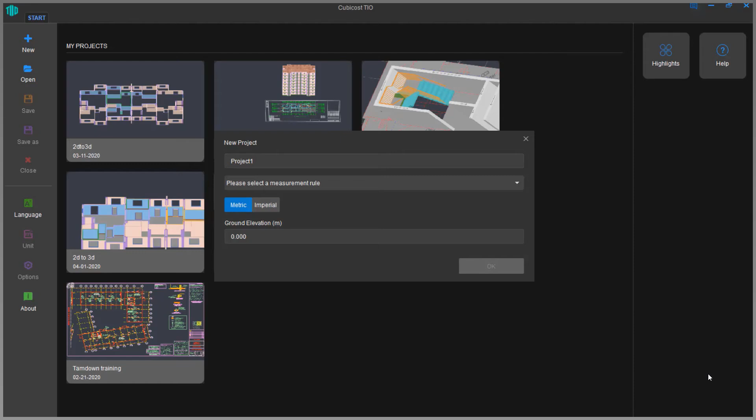So the themes were reduce, how you can reduce your time wasted and add value where it matters most. Avoid duplication of effort, that's with the use of our intelligent measurement rules. And finally, improve your accuracy of calculation.

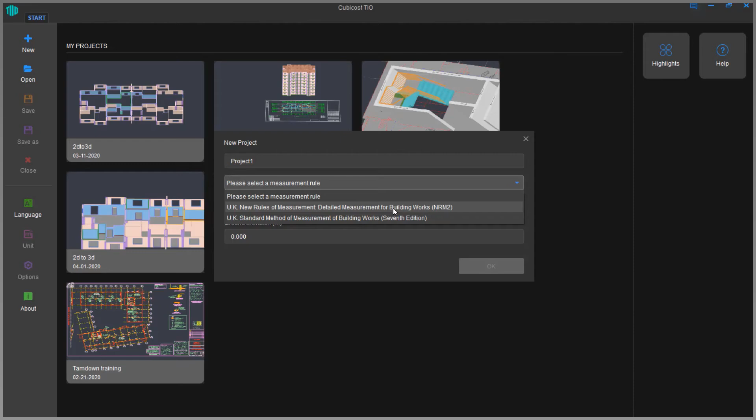Here I'm creating a new project so I can demonstrate this to you. As you can see, when we create a new project, we get the option straight away to choose between NRM2 or SMM7. Of course, if you are viewing this webinar from elsewhere, we have local packs depending on the country you're living in as well, for quite a few of them, so please do get in touch.

Once the project has been initialized and it's loaded up, you'll be presented with this view.

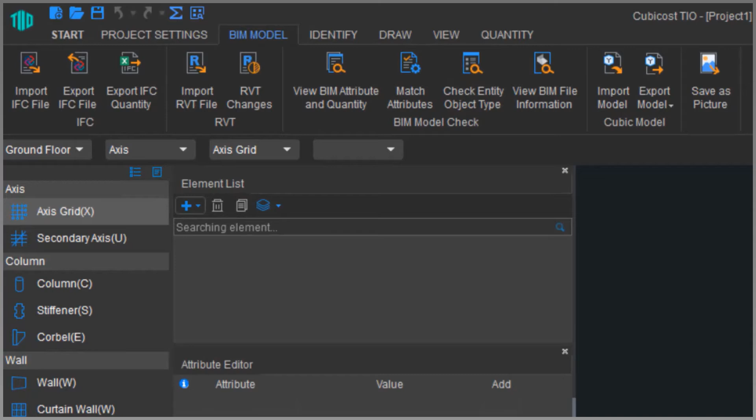What you'll notice is up top we can work in BIM, so you can import IFC, you can also export IFC, and import Revit models, and if the Revit model has a change you can work with them as well. Another way you can work is by identifying.

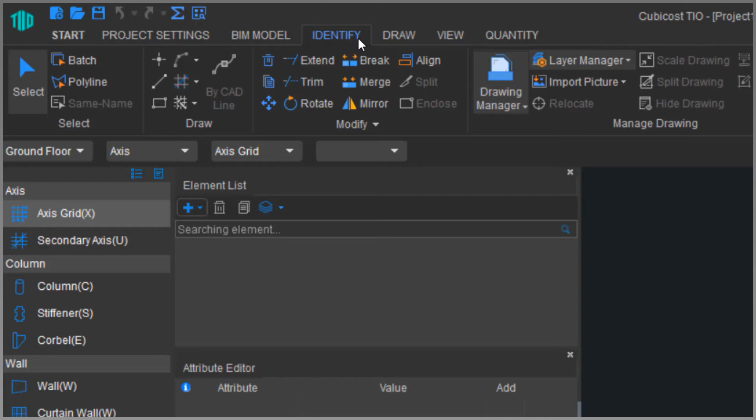Identifying is the process I'll be covering today. That's for our 2D to 3D takeoff. It's when we try and speed up the process by using either layers or colors to do the takeoff. And finally, manual takeoff as well, so if automated is not what you want to do and manual is better, you can do a manual takeoff.

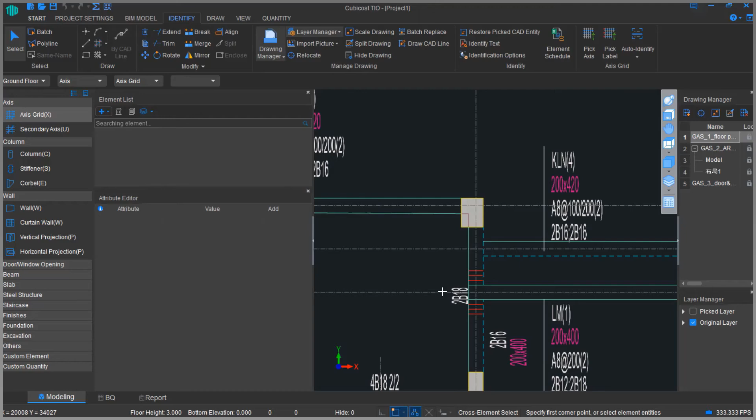I've just brought in this drawing. As you can see, this is a structural model with some very common building elements. So that is a beam. We also have a column here. And the other one is just a slab and some openings.

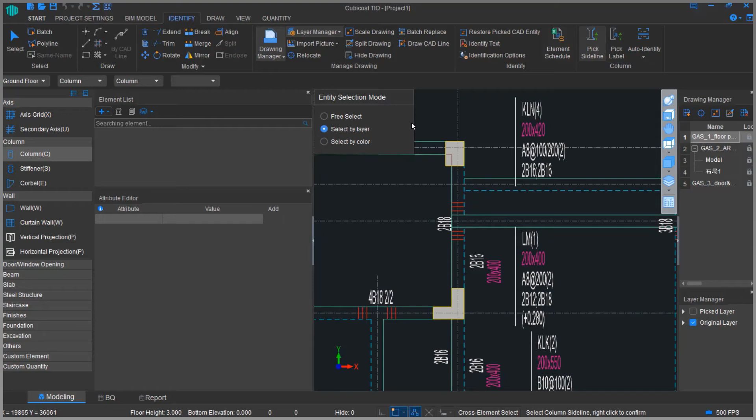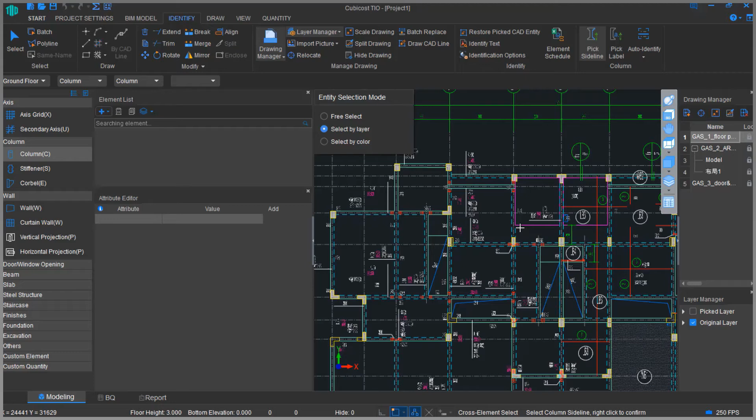Before I move on, one of the things I wanted to cover was digitalization. This is a 2D drawing, a CAD file, but whether it's CAD or PDF doesn't really matter, because we're able to automatically color it. We color it because if layers are not available, we can automate the takeoff based on colors. So when we pick the sideline and tell the software that the outskirts of a certain building entity represents a column, a beam, or any other building element, it's able to identify the rest.

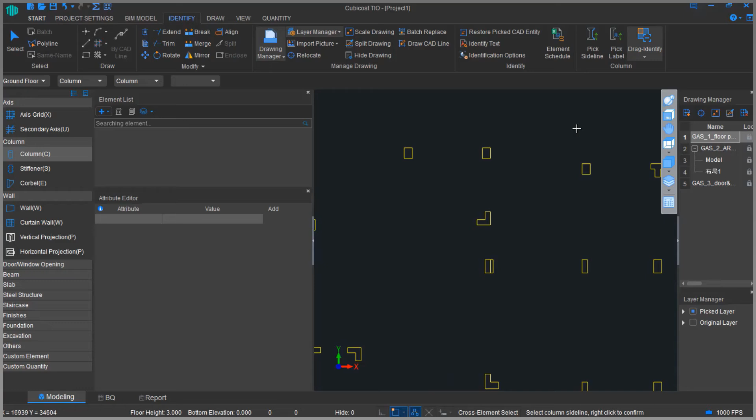Now what we'll do is go to a column in the drawing, zoom in, and tell the software that the outer layer represents a column, then drag identify to say what that building element is. As you can see, irrespective of the shape, it's automatically found all of the columns present on this floor. Now if I drag a box across certain ones, it gives it its properties, and I can do the same for all of it because I know they are all columns.

You'll notice on the left hand side they've been automatically categorized. So you can see the T-shaped, it's got the sectional width, sectional height as well. I can click on any of the categories and see how many of them have been used in this project, this takeoff. So that's 3.

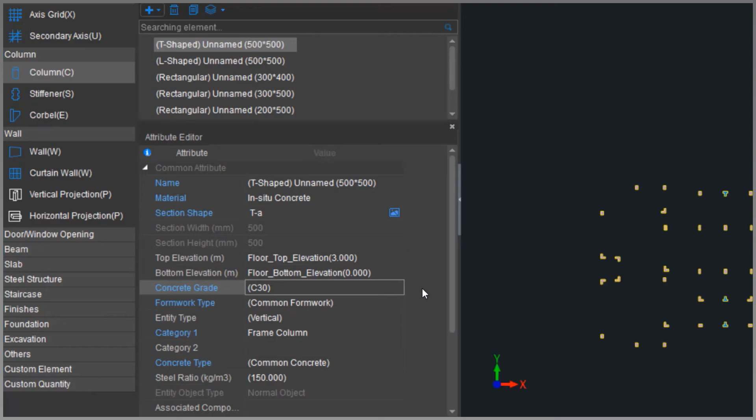I can change the attributes whenever I like, and doing so will not only change how the object looks, not only change the model, but it will also reflect the quantities that it generates, and how it interacts with other building elements. You can also change the concrete grade. By default it's C30, but that's something we can change in the backlog or directly here.

So if I was to just calculate the quantities for the columns, let's see what we've generated. We can view expression to see which calculations would be used. Or we can head over to view quantity, and now we can see it's been split by floor, material, concrete grade, entity type. I've got area of formwork, number of pieces, weight of rebar, the girth.

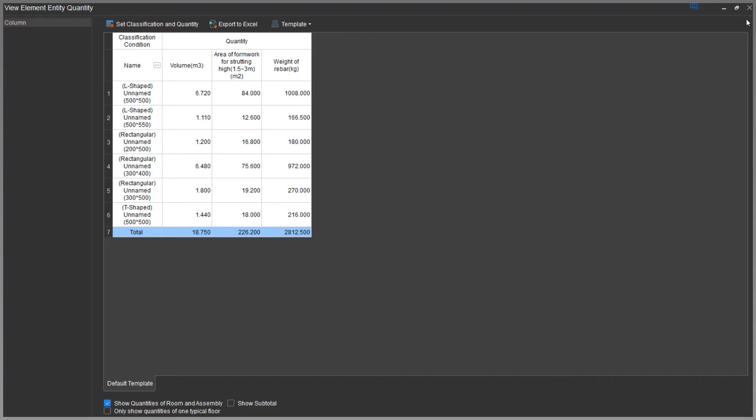And if I head over to set classification and quantity, I can make this as simple as I like just by including the name. And if there's anything I'm not interested in, I can simply uncheck it. I can either save this view or export it to Excel. So that's what we mean by having to avoid duplication of effort - just because we have the intelligent measurement built in, you automatically generate advanced measures.

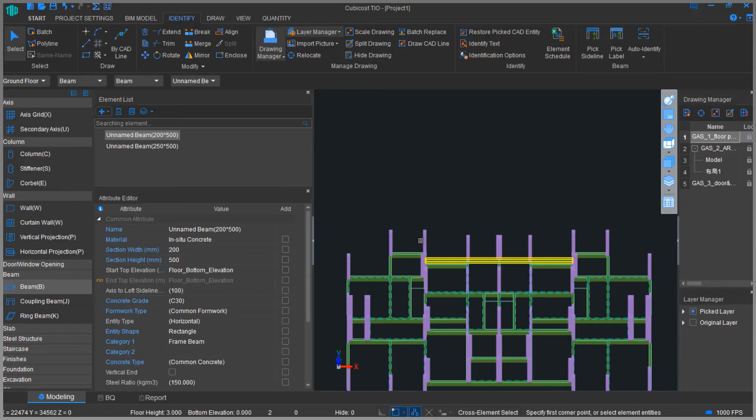Now if I was to repeat the process for the beam, it's exactly the same. Just recognize where the beam is in the drawing, and then you can automatically identify it. One thing I didn't mention was whether it's 2D, DWG, or PDF, it's automatically recognized in our software, by layer or color.

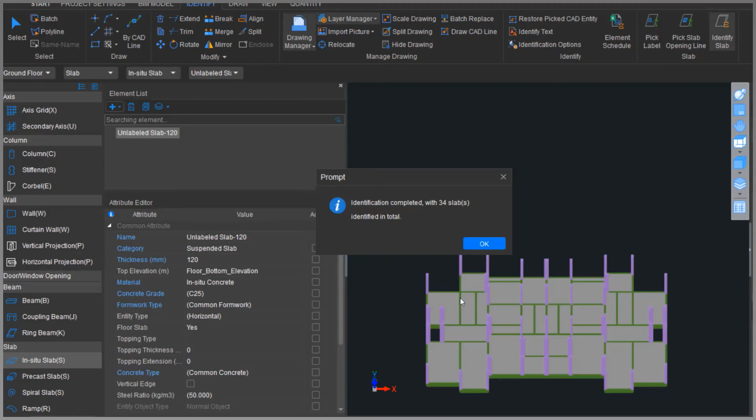Furthermore, let's do the slab now. So when we identify the slab, it bases it off enclosed areas, and it's able to do that. And of course, we can change the settings over here, which will impact the quantities.

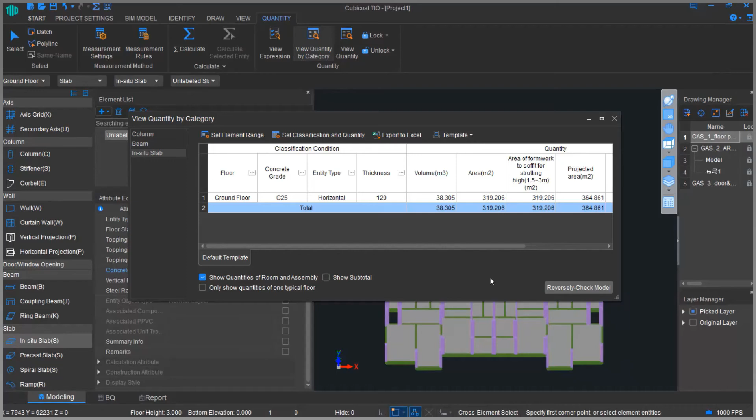So if I was to just recalculate this and then view the quantities, you'll get a very similar view as you got earlier. You have the building elements on the left hand side, and depending on the building element you're in, it will get its respective quantities automatically generated. So there's quite advanced measures, and you can just export this to Excel whenever you like - for instance, here you have it separated by column, beam, and slab.

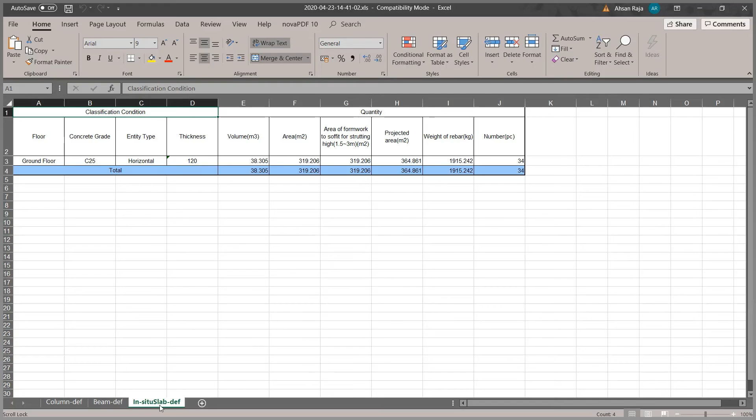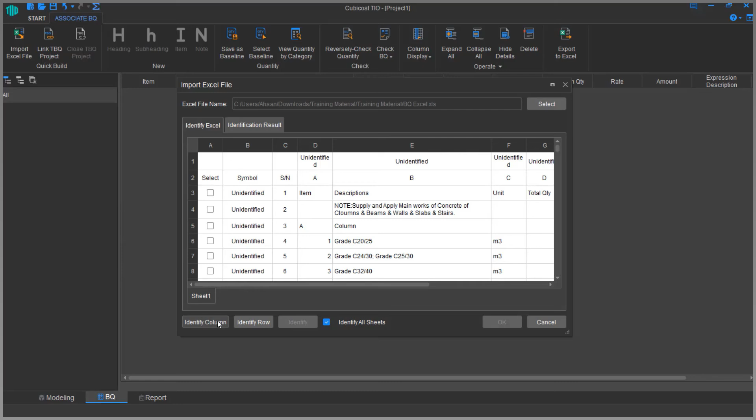Now I've got a question for you. How do you respond to change in a model? Suppose there's a design revision or anything else like that. How do you respond to it?

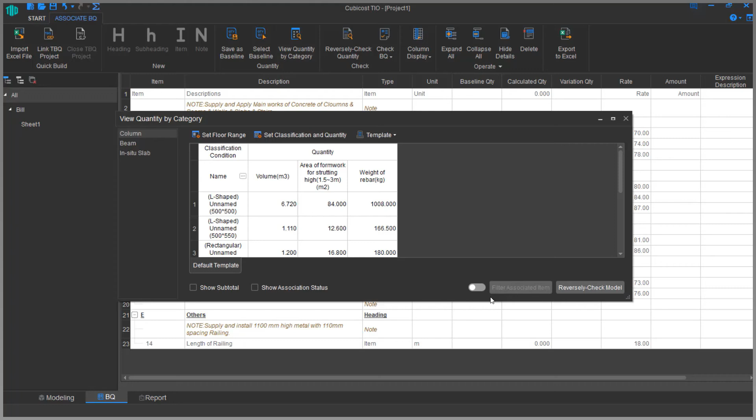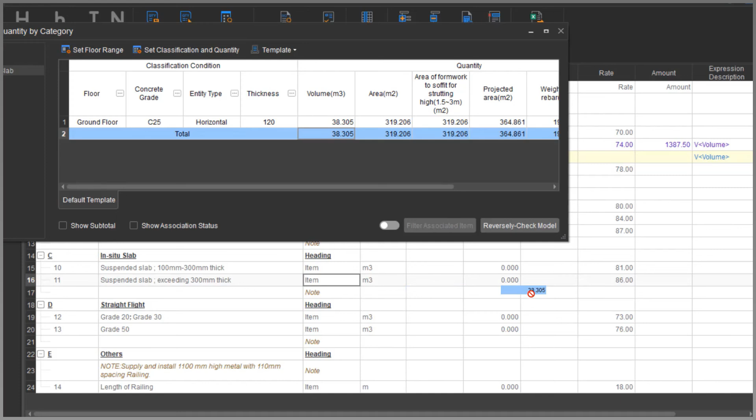Let's give this a test. Here what I'm doing is I'm just linking some of the quantities to BQ, to an Excel file. So let's take the total volume of the columns and just drop it in. This is much better with two screens, but let's just cope with it for now. And let's also drag and drop the total quantity for the slab.

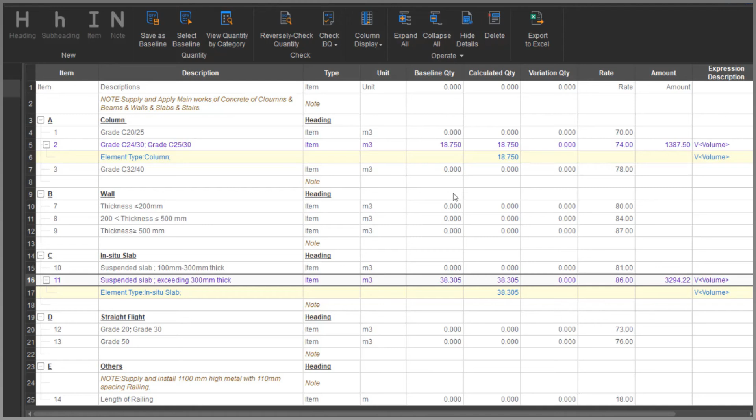What we can now do is we can save a baseline. Saving baseline means if there's any variation, they will all be accounted for. So suppose we just reverse check this first, see where the quantity is coming from. It just takes you to it directly.

Another thing we can do is we can see the association status, to see which quantities have been linked, what has been linked, and that turns to green.

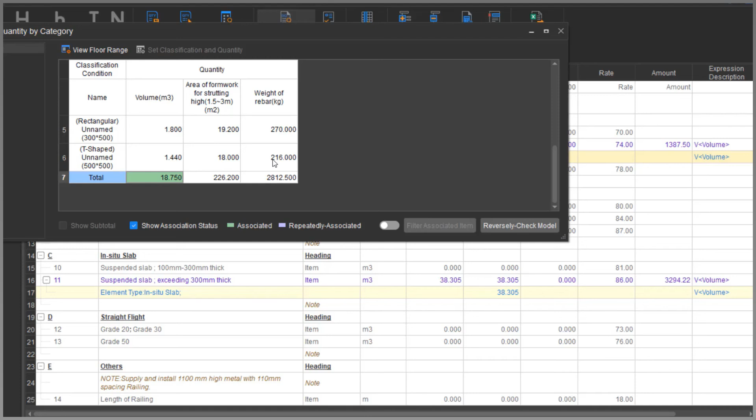If a quantity has been associated repeatedly, then it turns purple. I'll just demonstrate that to you on beams here. So if I associate the beam once, it turns green. And if I was to just drag and drop it, let's say here, it turns purple. It's just so you know when you're double counting.

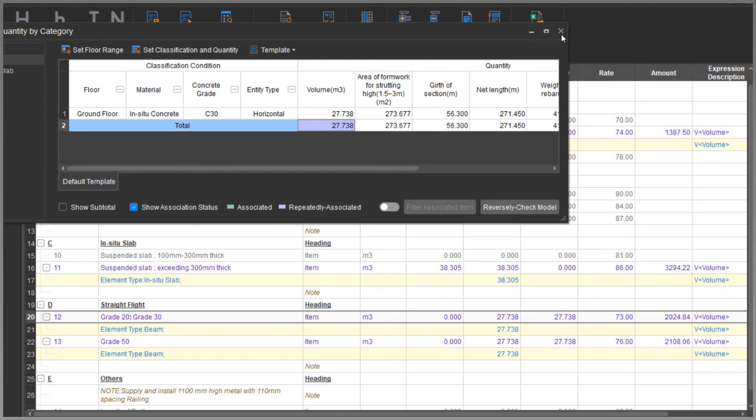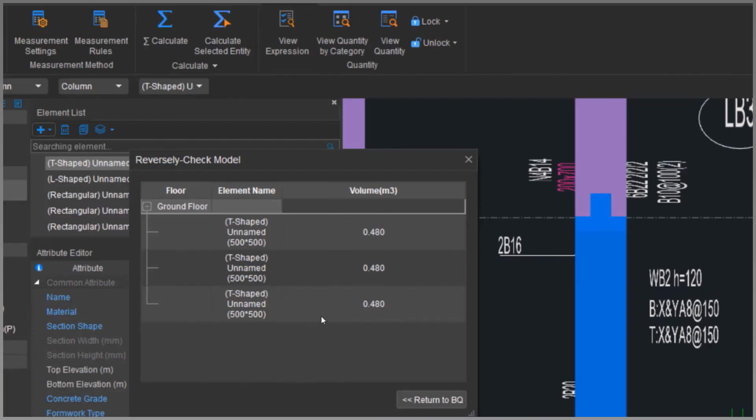So moving on to my example, how do you deal with design change? I've saved a baseline and I know that that quantity has been associated. What I can do is I can reversely check the model. Reversely checking allows me to improve my accuracy of my calculations. I can look at quantities, go back to it, and make sure are there any anomalies, is there anything over here. Just quickly glance through, I just noticed the 0.450.

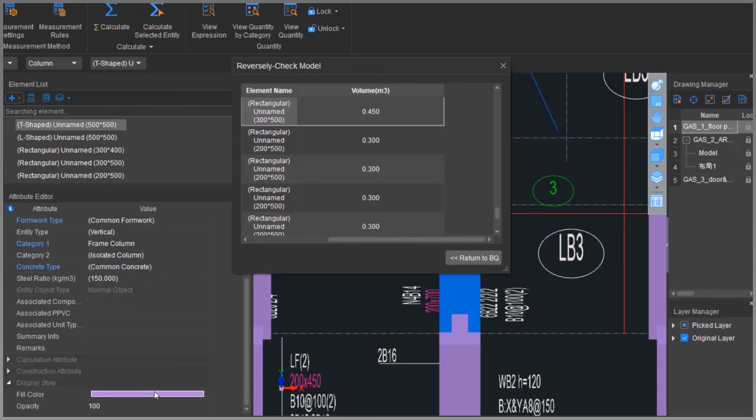If that's something which is standing out and I just want to visualize it further or interrogate it, I can see the attributes for that entity, change its color, and it's been associated differently now. I could also change the name as well, so it's categorized completely separately in my report, but I'll just skip that for now.

Let's say you receive a design change, and the design change, this 300 by 400, so all of those blue ones, have changed, and let's say there's been an increase. Something ridiculous, let's say it's 350. No, let's say it's 750 by 750. And let's also change the color.

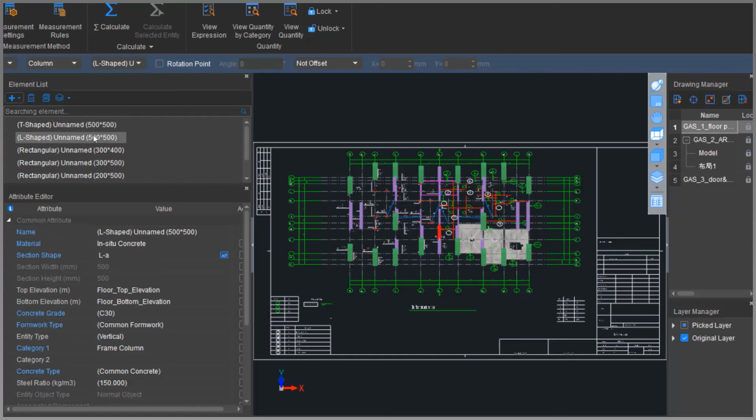This is really beneficial because you can even export this as IFC, so just for visualization it's great. And let's say there's been further changes and the thickness has been reduced from 120 to 100.

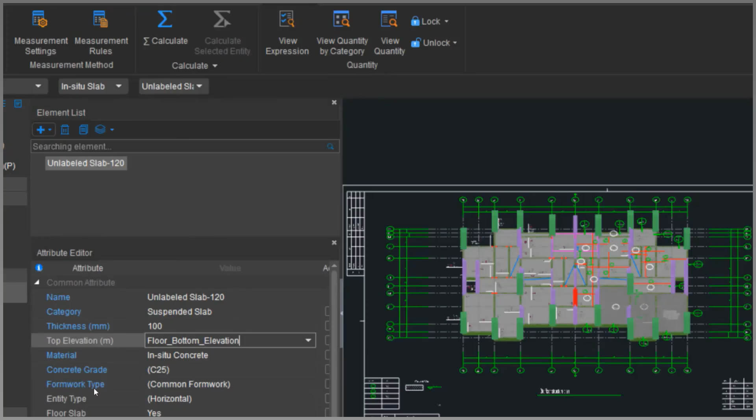Now if we're to recalculate this, run the quantities, just wait for it to complete and head back over to our BQ section, we are now able to see our original baseline was 18.75. New calculated quantity is 42.645, and there's been an increase of 23.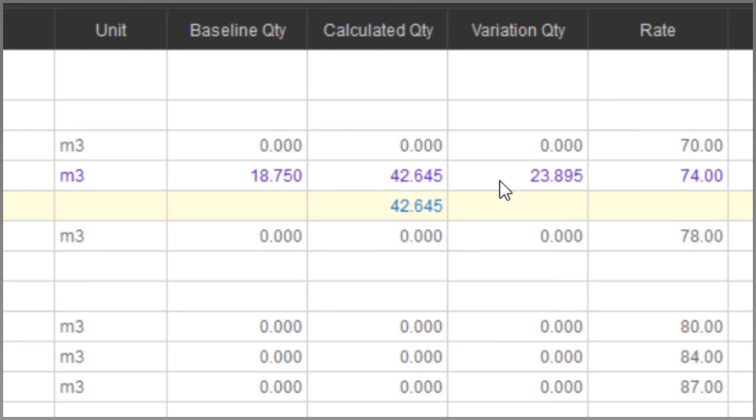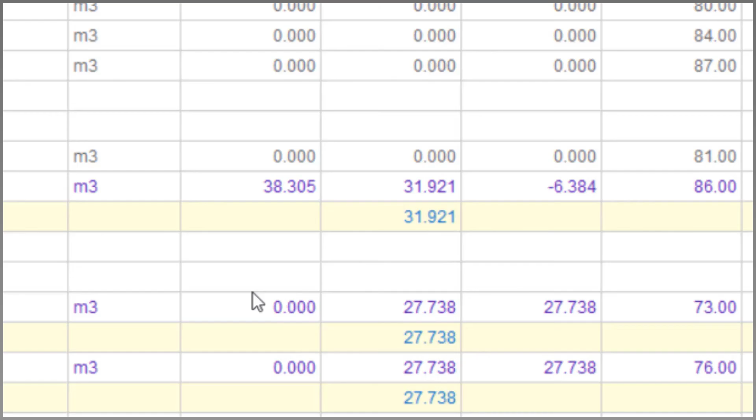If you were to do the same thing and just interrogate the slab, you can see there's been a reduction, as it's a negative number. Just imagine this is just the first floor. Suppose it was a 20-story building, just accounting for those small changes, it can lead up to quite a lot.

It just gives you that confidence in your numbers, just knowing that yes, I'm happy with the quantities that are being generated.

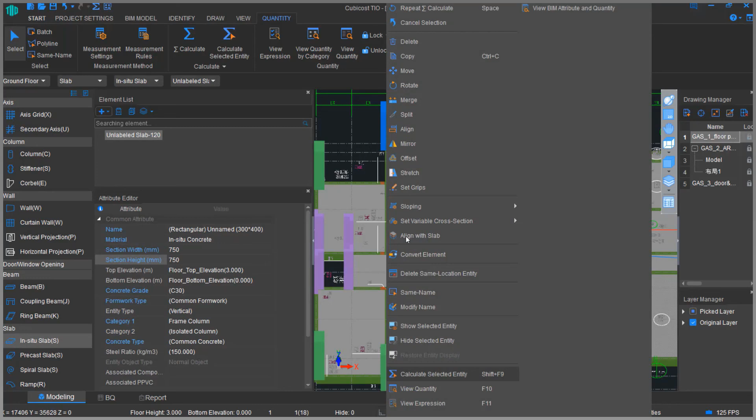Furthermore, what you can do is let's have a look at the expressions again, where you can see how the quantities are being calculated. If you want to see how this slab is being calculated, we can see the 3D deduction. We are able to see the original quantity, how it's deducted from the beam, and so on.

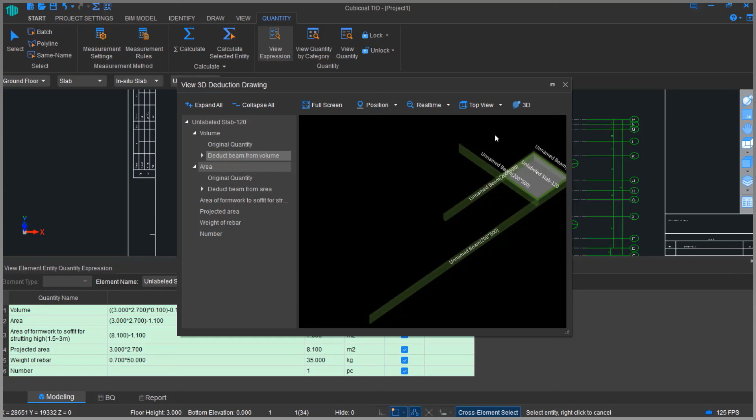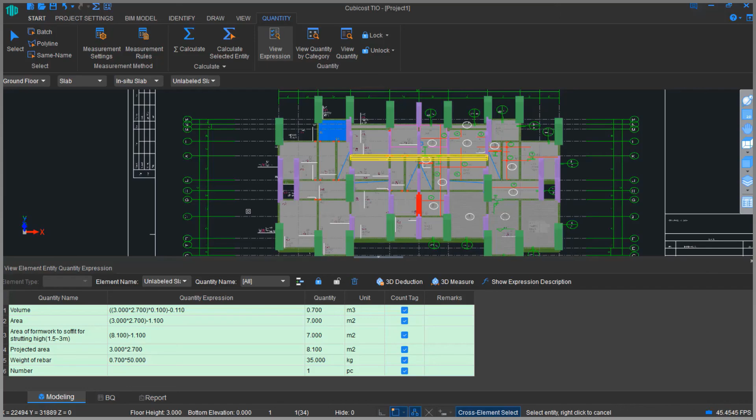So that's very powerful in its own sense, where you can see exactly how your quantities are being calculated, how they're being generated. So you can not only reduce your effort, avoid manually doing the calculation of pretty much anything you have to do.

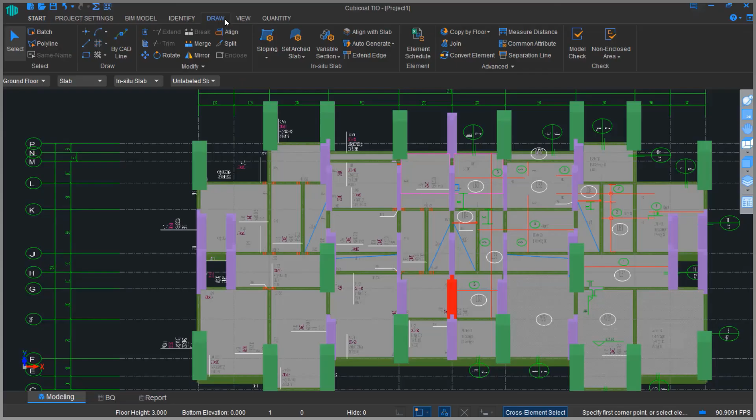You also have the power of changing the measurement settings, the measurement rules, so you can really hone in on getting your quantities. Instead of spending countless hours calculating certain sections, it's just a matter of clicking calculate and knowing that your quantities conform to SMM7, if that's what you've chosen.

So that's it. You can then get your quantity by category, have your building elements on the left hand side, and just export it to Excel.

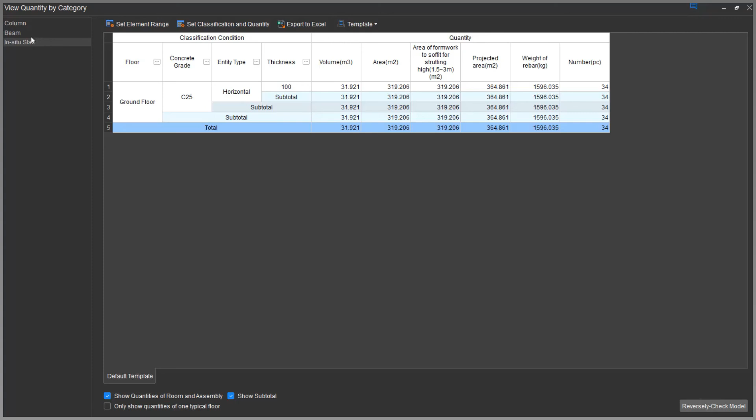And as you know, depending on the type of building material or the building element you're in, they'll get their own respective calculations. Being able to reverse check the model, it just gives you that further reassurance that your quantities are correct. You know exactly where your quantities are coming from.